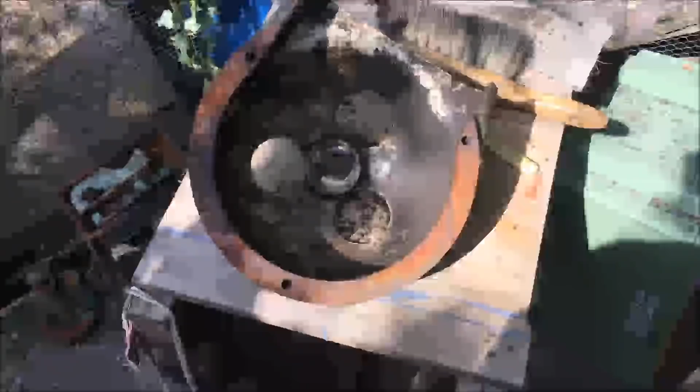Well, the sun's out, so we're doing a bit of deep cleaning on the auxiliary components. I think this is the clutch housing. I can't remember because it seems ages. It's nearly a year since we took it off anyway.

I've got to check the bearing, but I'll be highly surprised if that's in good nick, given the one on the other end's got, I think, 17 thou clearance on it, or wear.

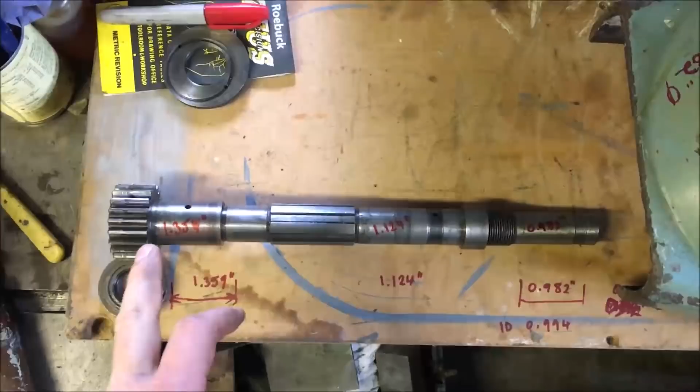So I'm taking a look at the main through drive shaft. Just to explain it, this end of it is sitting into the headstock inside another gear. It runs in a bronze bearing. You've then got a spline shaft, a pair of ball races inside the pulley which is being driven, and obviously the clutch brake unit around that to transfer, so when the clutch is engaged that pulley's transferred and basically drives onto the splines.

Now this section here and this section here both run in bronze bushes. That section is into the outer face of the casting of the headstock, so that face of the gear via that sits up against there.

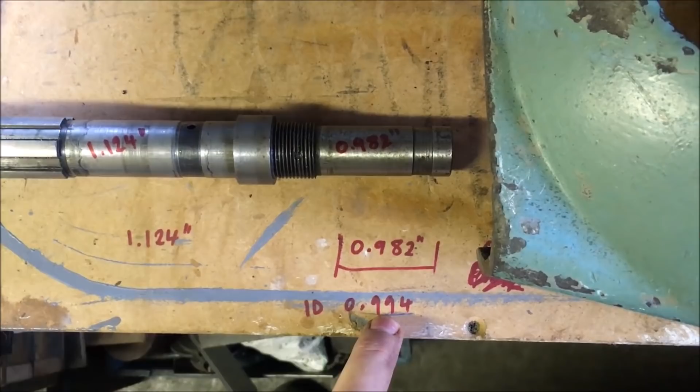When I've measured it up, there's about, I think it's 12 thou clearance between diameter - oh dear - that and the ID of that, which seems hellish excessive. At the other end of it, I've got a dimension of 982 thou against 994 thou on the ID of this one, which again seems somewhat excessive.

Now that shaft's only actually rotating when the lathe is actually working. When the clutch is disengaged, that shaft just sits still. So it still seems a little excessive as play.

Starting to look at it in terms of why that wear has happened, apart from the fact it's 70 years old. The outside bushing has got this little Winkler oiler. So you spin that round, a couple of drops of oil dribbles through, and you can see the oil lines. So I don't think that the bearing has worn excessively.

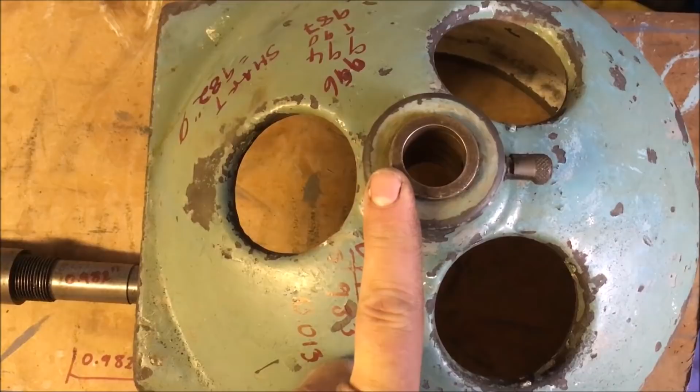It seems an odd size for it to be a few thou under an inch. I would have expected it to be an inch and then worn to slightly larger than an inch. But the shaft, as I say, is measuring at 982. And there's wear on the shaft as well.

What I've measured up is if I actually increase that to, say I half the difference on it, so instead of it being 13 thou, say I put another 6 or 7 thou on it, the nut that goes on here would still clear it. So I could build that end up. And we've already established that these bearing seats have been built up. They're a thou under an inch and an eighth.

Now this one doesn't seem to be excessively worn. There's about a thou variation over it. But the bronze bushing is worn.

Now that bronze bushing has oil lines in it, but there's no feed to it externally. There's an oil line in here, and it's drilled out, and that drilling goes all the way down to there.

So there's oil that can travel along the shaft, lubricate these two bearings, lubricate that, and I guess lubricate the face. However, the only way the oil can get into there is if, you like, is the oil inside the headstock, which seems a slightly odd setup to me.

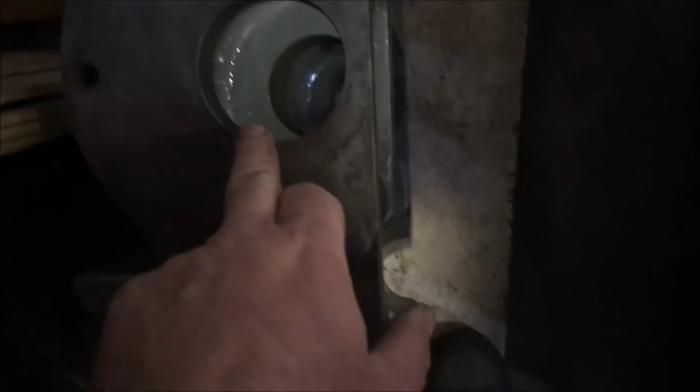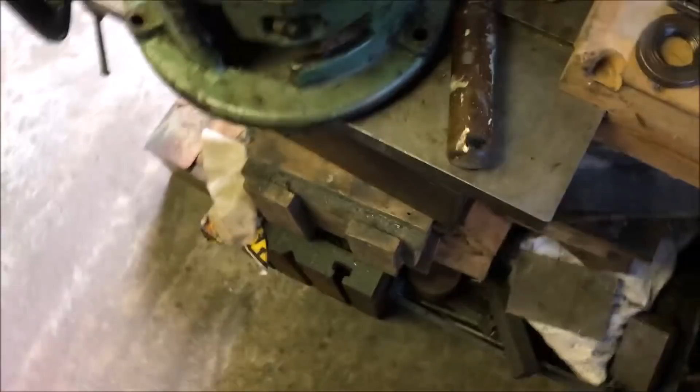That's where it's going in. So it would mean that the oil bath has got to be high enough for it to be able to splash in, or certainly get into that outside hole. And I think at some stage that oil bath's been allowed to drop, and the majority of this wear has occurred as a result of basically lack of lubrication.

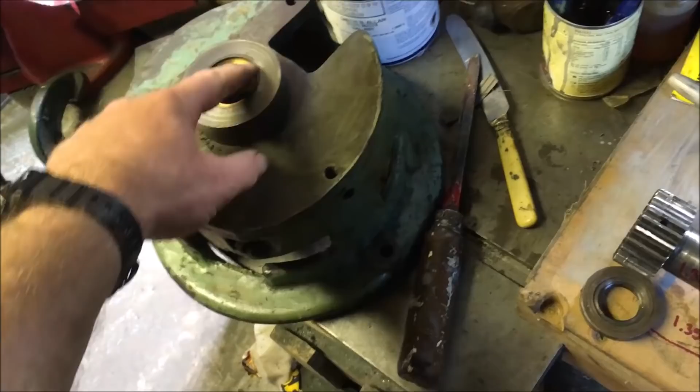What I'm toying with the idea is, do I actually - I'll have to replace that, I think, because I could build that up. It's not that far off though. The wear is all in the bearing. So if I replace that bushing, do I then line myself up?

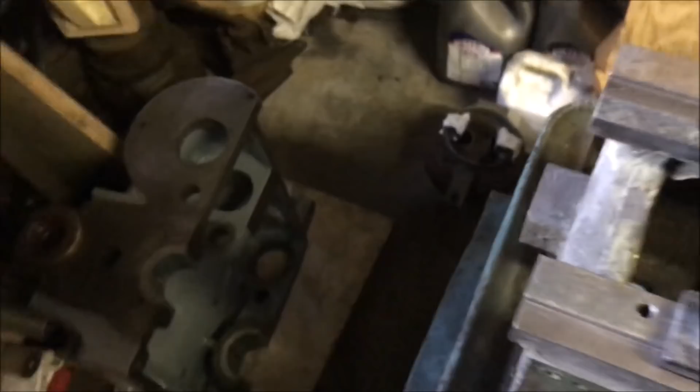And from memory, I think that's the top of the casting, and actually drill an oil line through there, pick it up on the top of the casting there, and then I'd have to have some kind of arrangement to bring it out, and then just put another oil feed on, so that would actually feed directly into that, which in itself would just give an additional feed down the line.

Seems a lot of work. Maybe I'm overcomplicating it, I don't know. But I've not seen anything like that before. It seems an odd way of doing it.

Pricing things up, if I replace that, just that one piece of phosphor bronze, just to do that one piece, is about 40 quid. So I've got to do a bit of shopping round.

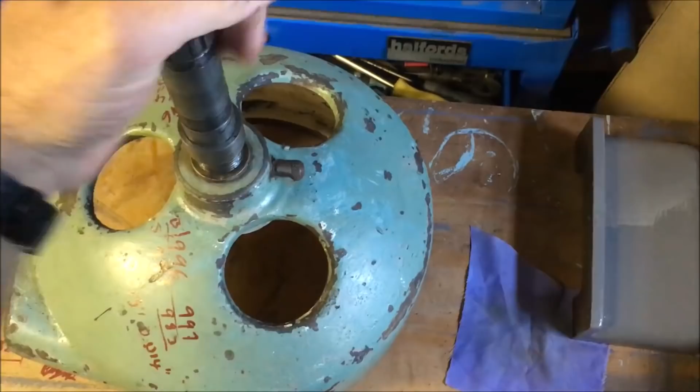I don't want to put it back as it is, because it's a bit, I think the phrase I used to hear at work was, it's a piss fit. It'll certainly run like that, but I don't want a load of rattling and clanking.

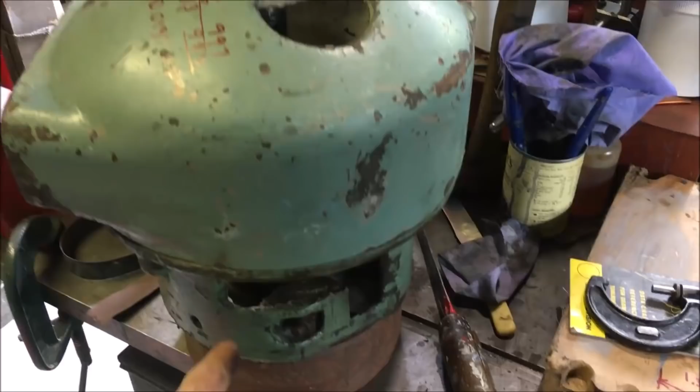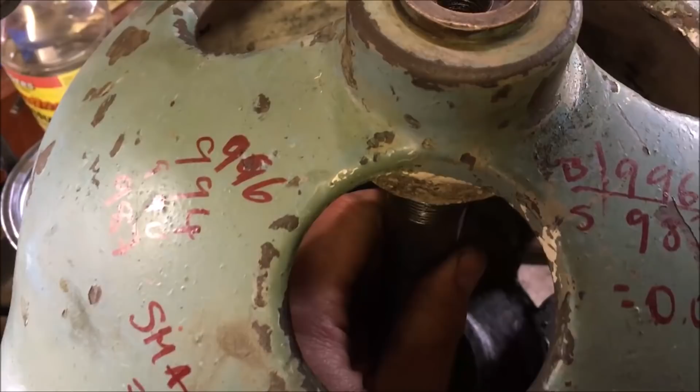So just for me to get a better idea what the hell's going on, that's the two halves of the outer casting for the clutch assembly, with the shaft in position. It's not lubed or anything, and there's nothing hanging on it, but if you watch the lower portion, most of that noise is from the lower bearing. The top bearing isn't actually that bad. I mean, I'd prefer it a little bit more snug, but...

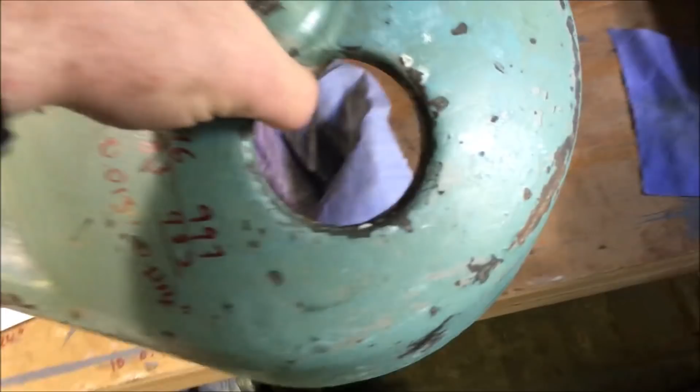We'll pull that off. That's what we've got to get a shot of.

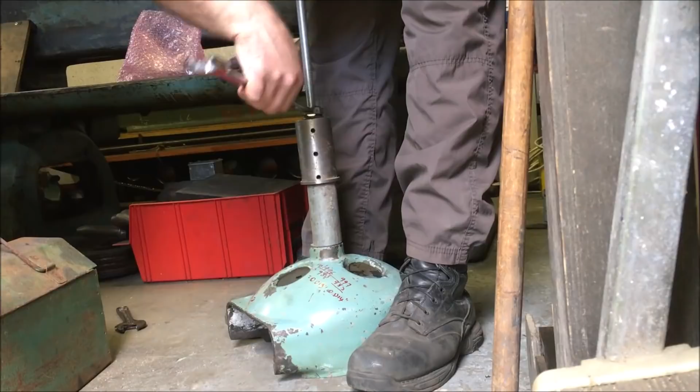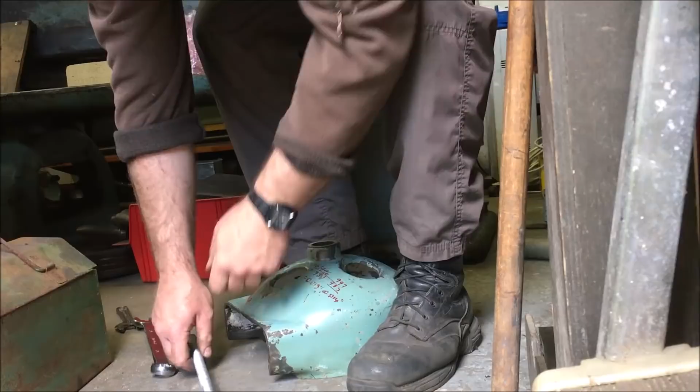One bush. Get another couple of them and we can have our own shrubbery.

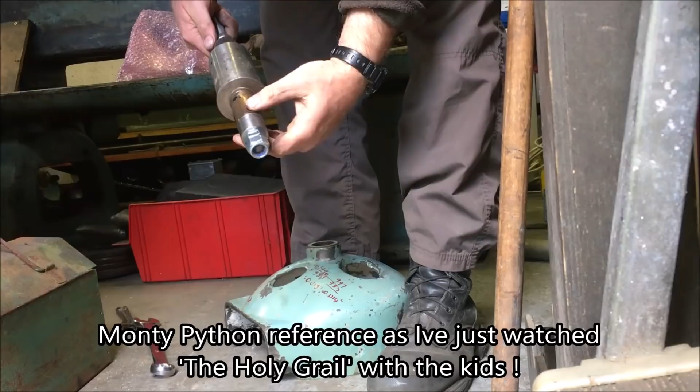Interesting that it's been relieved all the way around the lubrication point.

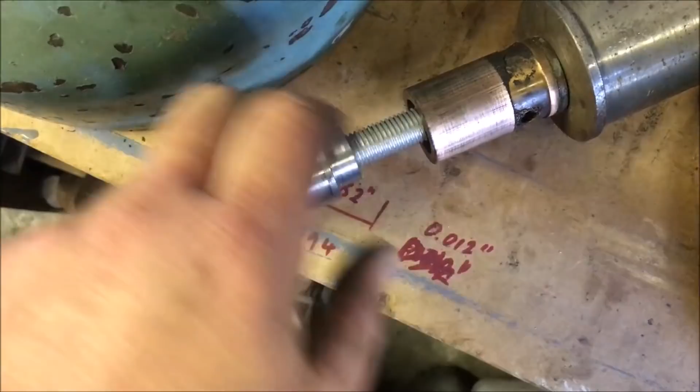So I've pulled the first bronze bush out, that's the tail end one. The plan is to make some new replacements, but make them to size the shaft that we've got. So I made up a top hat collar with a clearance hole for a 16mm M16. That goes up inside and locates, and then that's just happened to be a spacer larger than that.

And then there's a piece of tube which I'll go and find, which is actually just a length of scaffolding tube. So the nut's on the bottom, threads up through with the collar, then a tube, and then this thick washer, and just wind the end down.

However, got to lock that end, otherwise the whole shaft spins, which is a pain in the arse, because then once you start pulling it, that goes up inside the hole. But it came off, took about 3 minutes.

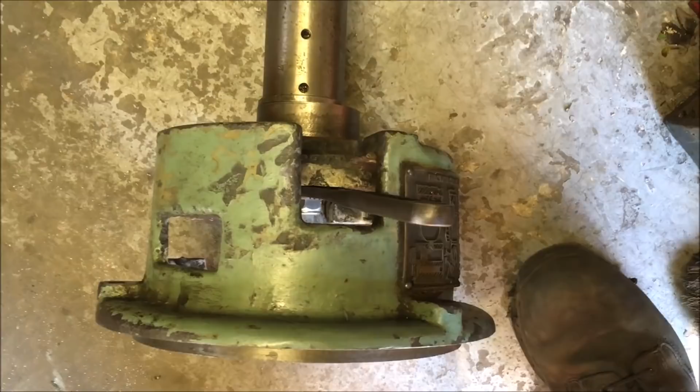So we just set up for pulling the next bushing out. I've had to make a new another collar and tube, which was a piece of scrap tubing, which has proven to be pretty tough steel. Anyway, so I've got a locking nut on the threaded shaft, and then another nut over it, spanner locked on it.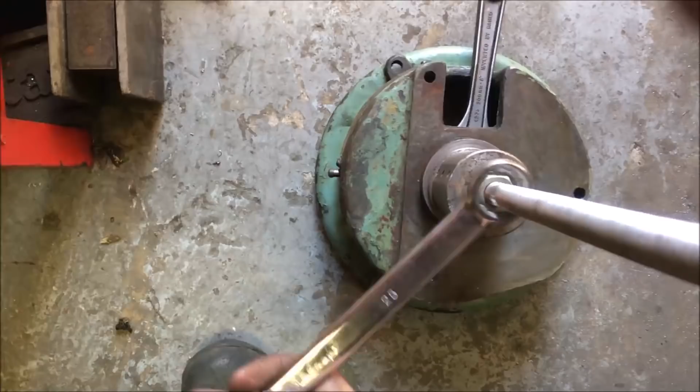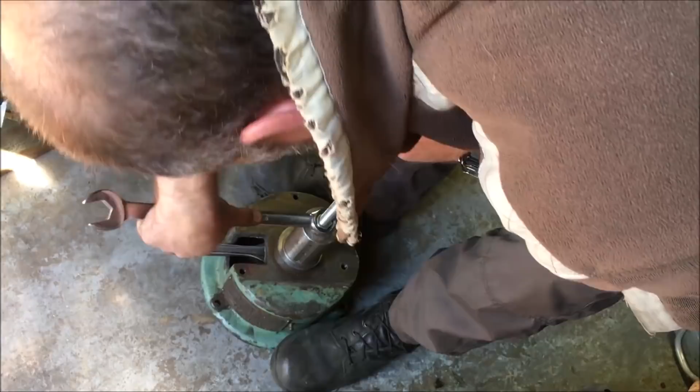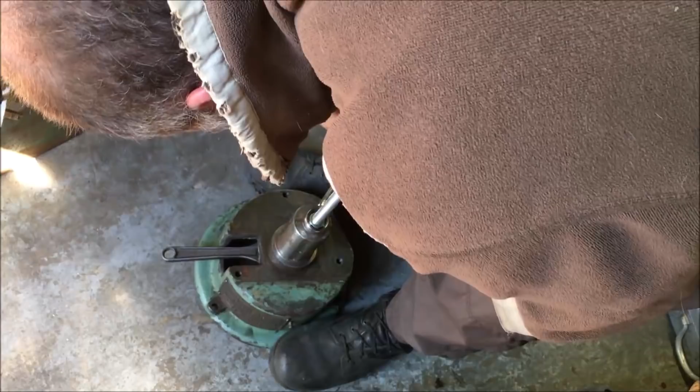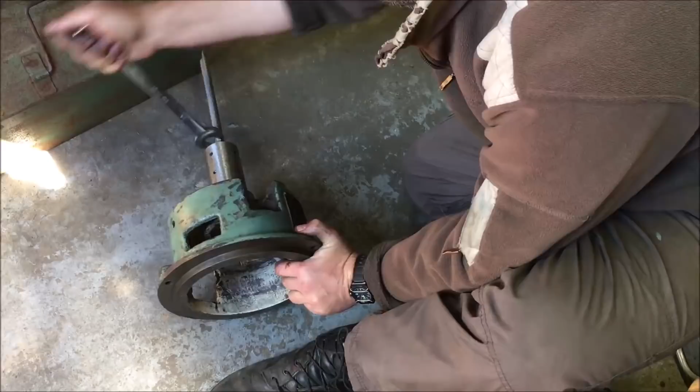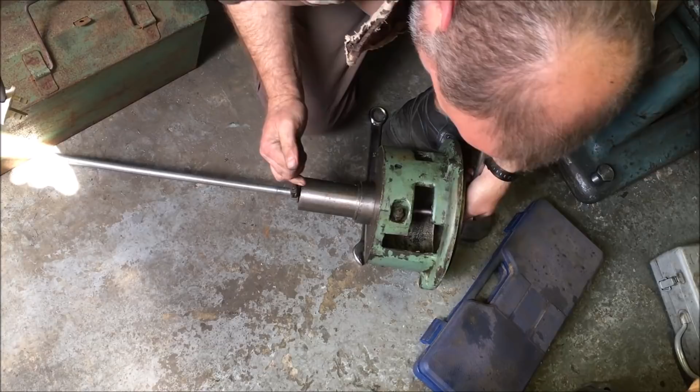I'll make sure that this collar is over the top of it. Only half inch in it. There we go.

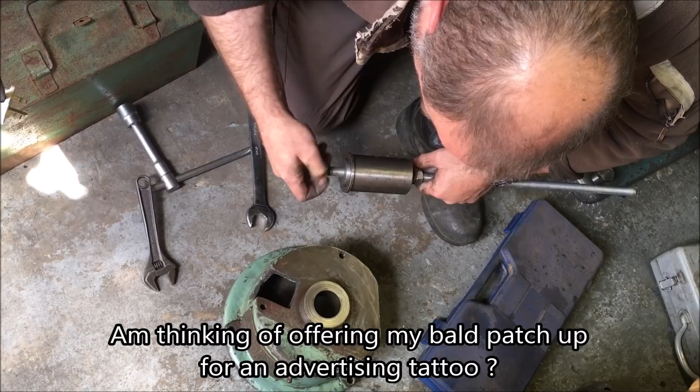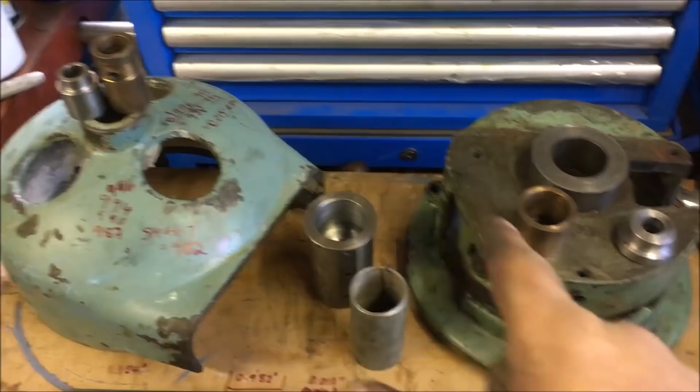Right, so there we go. Took a bit longer than anticipated because I've got to make that tube and then that tube. The two plugs were pretty much straightforward, and I'll use those to pull, or press in, probably pull them in, the replacements. So yeah...

Fresh saw cut end of a piece of bronze bar, cut with a power hacksaw, so it's a straight cut. What is it that produces that arc? It's bizarre.

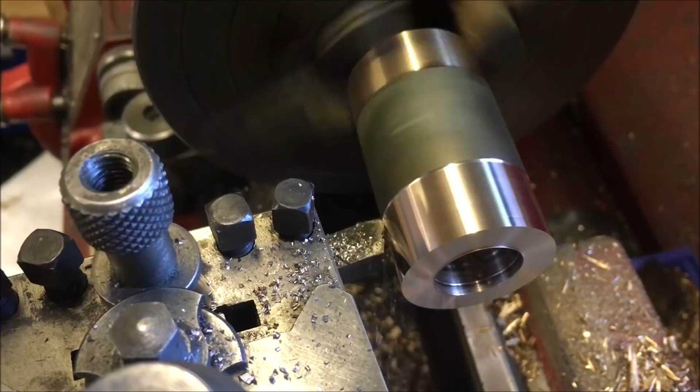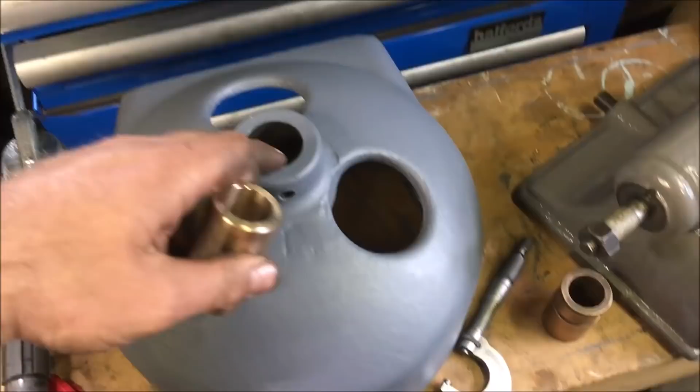That's the first bushing been made. And I've got 1.5 clearance, and when I've cleaned the end of that out, it's basically a fit. It's the same dimension, so that's why it requires a bit of a press fit.

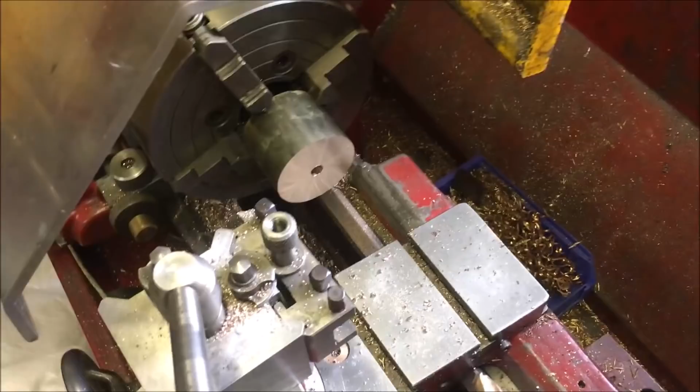Making the sleeves a slightly different way than I'd planned. Having chatted with Chris, I thought I'll ask him how he would do it. So the biggest difference is he only grips the very edge of it, faces it off, drills it through, and then drills it to about 1/8 of an inch under the ID. Then finish the OD to the size you want, then come back and bore the ID to the size that you want.

I've tried to extract from him the reason for doing it that way, and he just said, well, that's the way I was taught. There was various bits of conversation, but the long and short of it is it works and he doesn't change it.

Thinking about it, it would enable you to finish it all without taking it out, whereas my approach was: stick it in the chuck, whop a drill through, bore it out to size, then hold it on either an expanding mandrel or a mandrel that's made to fit between centres, and turn the outside so you know it's concentric. An expanding mandrel's far better than a wedge-fit mandrel, but yeah, it's just a different approach.

I guess my time's not costed on the basis of hourly rates, so if it's one fit in the chuck, it's going to be more effective, more efficient. Anyway, if I don't ask, you don't find out.

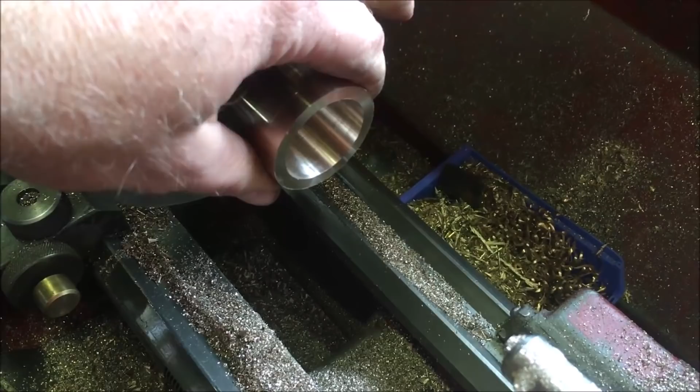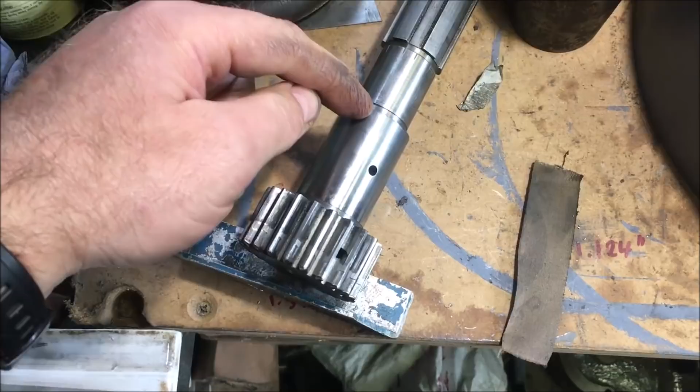Just waiting for it to cool down before we take the final dimensional pass. It's still got a bit of warmth in it. It's currently 1.5 thou undersize, and that's undersized to these positions. The centre section of that journal is half a thou below these. It was 1.5 thou, I don't know why. There was some quite bad ridges and wear, so I'm assuming that. Anyway, I've had that up and cleaned it up, and I've left this bit slightly under, so it'll be an oil pocket area.

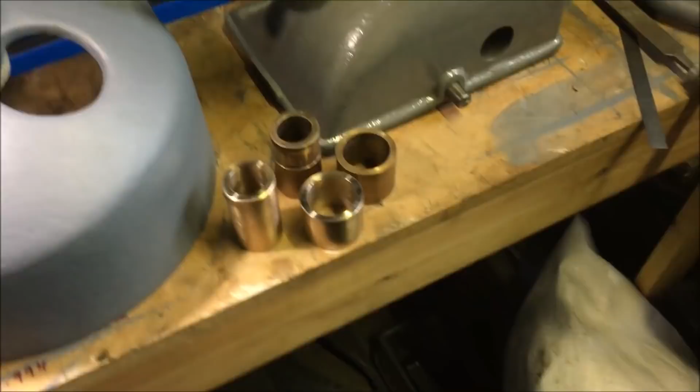Well, that's both the bushes made up now. Once they're pressed in, I'll have to drill the oil way for that one, which is the thin one, and then that needs scraping out. Chris says he's going to show me how he does that.

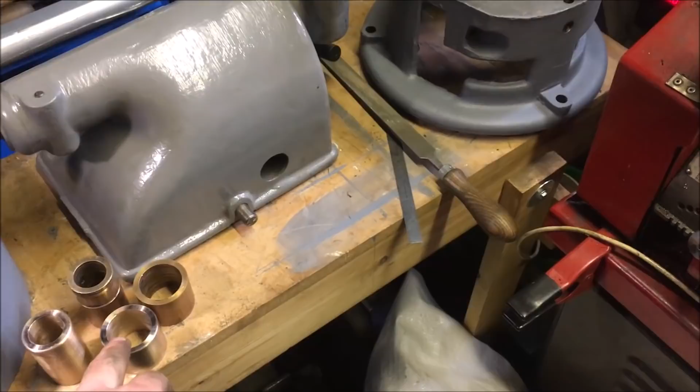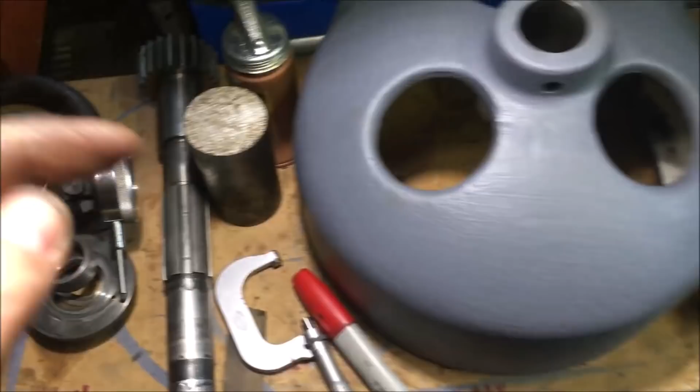That one then pressing in, and then from memory that's only got oil ways in it, but there's no - the oil is delivered via a hole in the shaft. So I'll be interested to see what he recommends for that.

Look at that waste. Ooh. Bit of sweeping up to do.

Got one more piece of bronze work to do, which is the shoes for the yoke, which moves the clutch in and out. Who knew sawing through bronze was so bloody hard work?

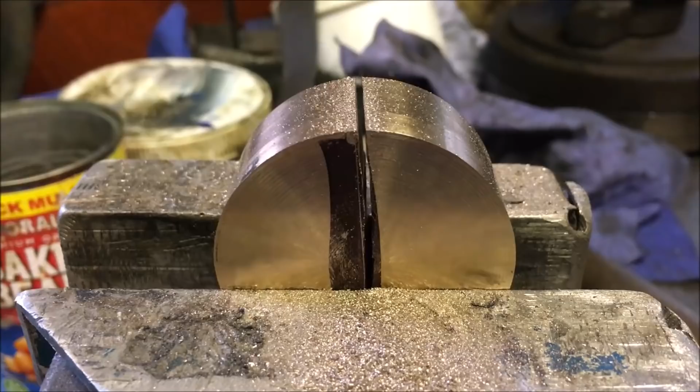I couldn't think of a way of holding it to do it any other way. Anyway, that's that done. I'm just facing it off now on the shaper. I'm only taking it slow because I don't want to spray chips everywhere.

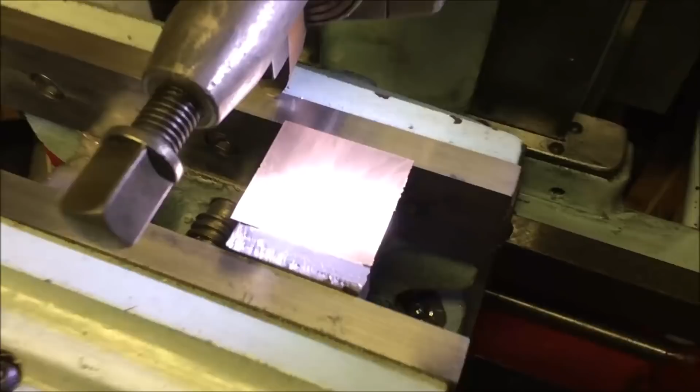It does make a nice finish. You can just see a little bit of chatter on the start of the cut. Yeah, shame my packer was a bit high - if it had been a bit lower, it wouldn't have caught. Anyway.

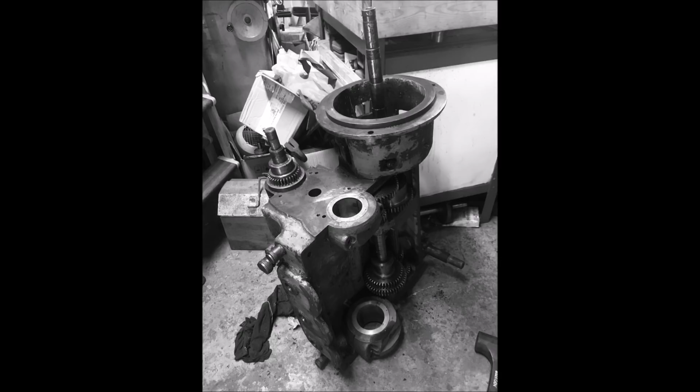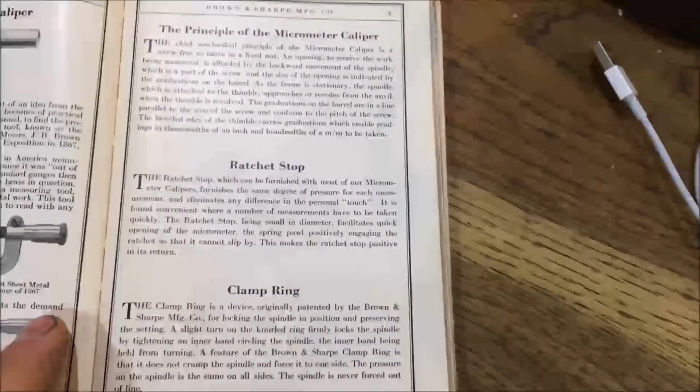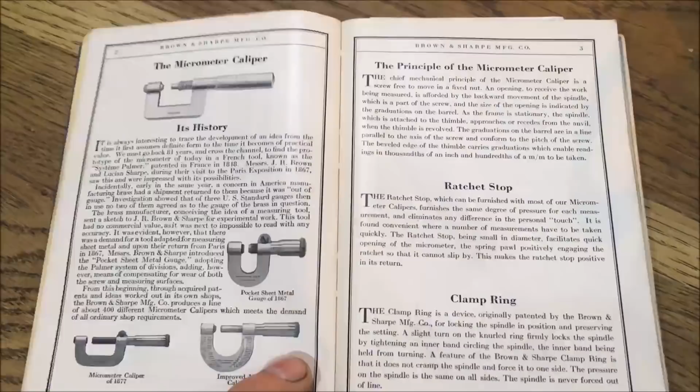Bit of an addendum. Chris lent me this Brown and Sharpe catalogue, from 1937 I think it is. I was just reading this - I'll take a photograph of it and then you can pause the screen and read down it, but it's the history of where the micrometer was developed. I knew it was French, but didn't realise Brown and Sharpe took it from a fairly crude tool to one that was, well, where we are today.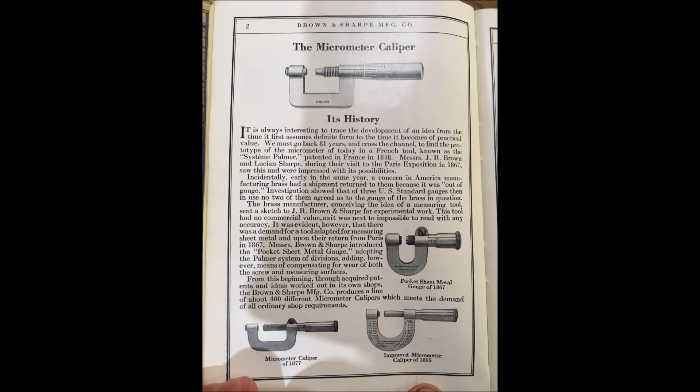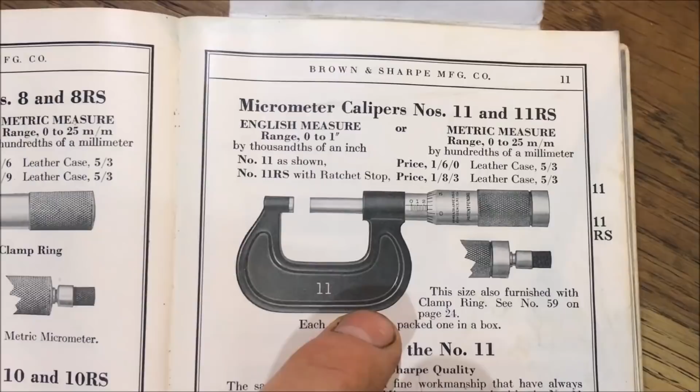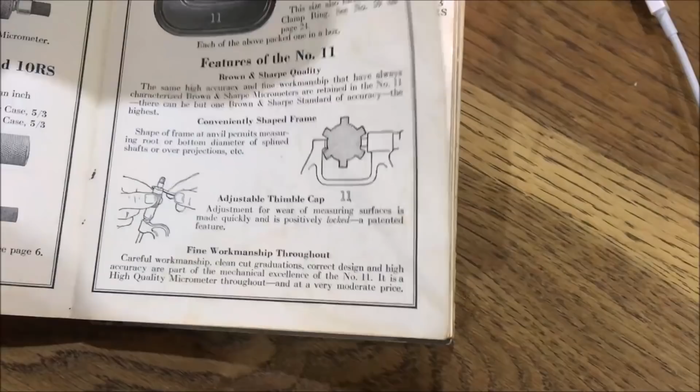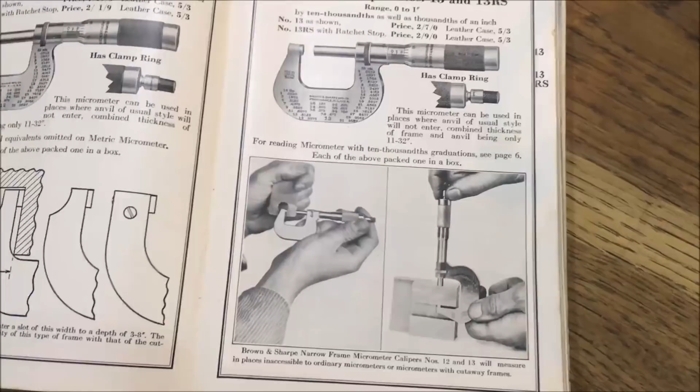The reason Chris lent me the catalogue is he's looking to replace a micrometer that he had when he was an apprentice, on the basis he hasn't got it any longer and he'd like to replace it, which is this number 11. Then he said later on, after he finished his apprenticeship, he was given a number 13, and he's not got either of them. He had a workshop in Stockport for 20 odd years, and it was robbed or burgled a few times, and a lot of his gear got half-inched, never to be seen again.

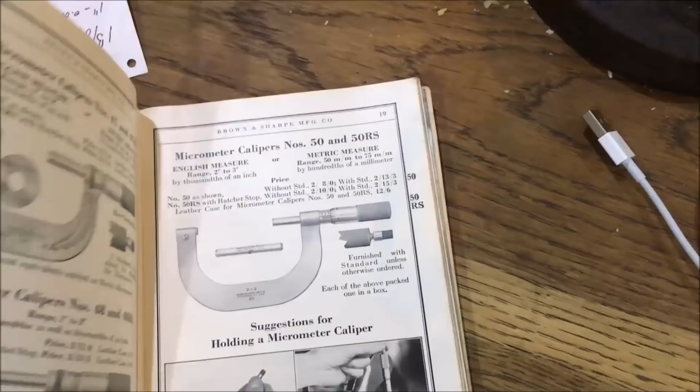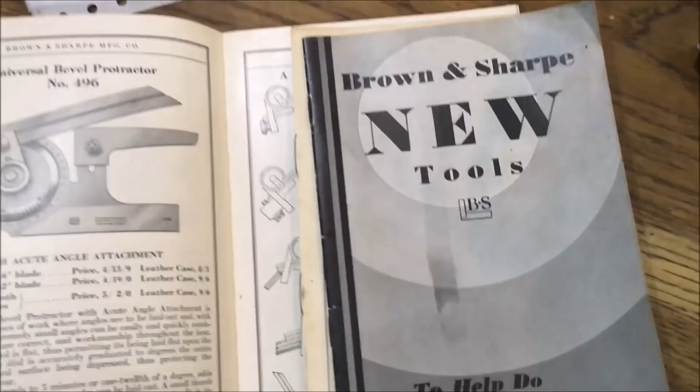But yeah, just flicking through the catalogue, it's fascinating, beautifully put together as well. I have to admit, this is the first time I've looked through a tool catalogue. There's actually a price list as well, a revised price list. This is something like 1938, I think - oh, 1936, that one. Yeah.

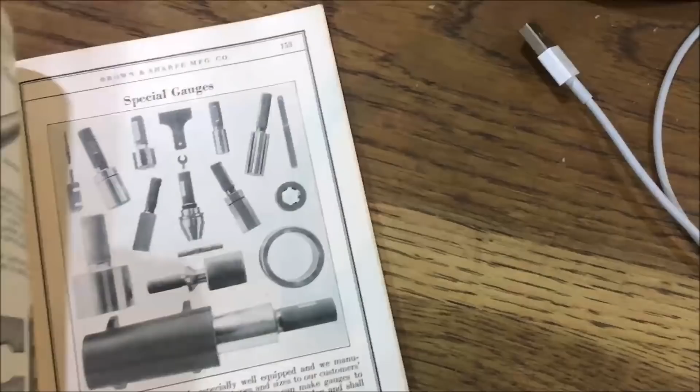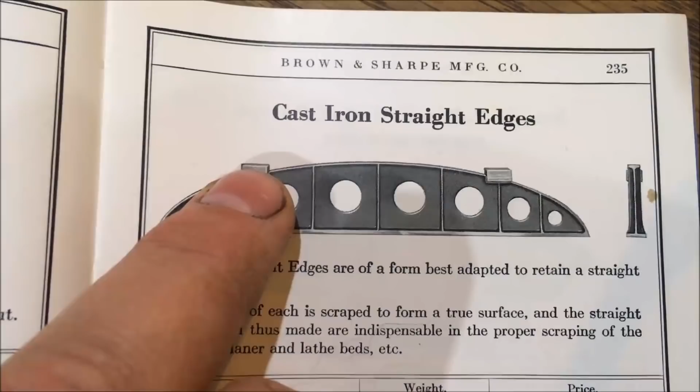What I found interesting was there's a section here showing the straight edges that they produced, of which we've got one in the workshop, if I can find the flipping thing. So that's surface plates and straight edges. You can see that's the design of the narrow one that still needs scraping up, because one of the - well, both feet want replacing. So that's a job for me later, but it's 96 inches.

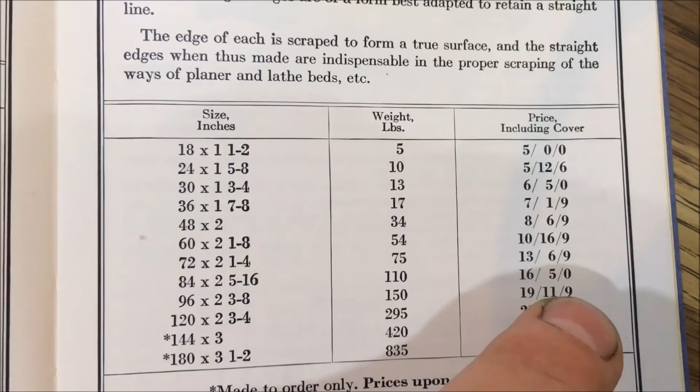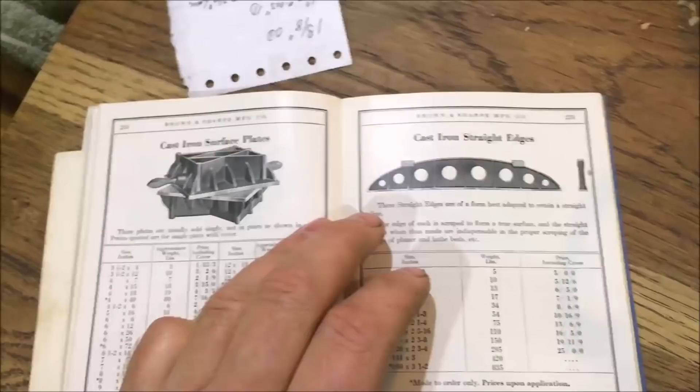Price 19/11/9, so I think that's £19, 11 shillings and 9 pence... bushels of corn or whatever it was. Yeah. Guess that would have been a chunk of money at its time. Yeah, all interesting stuff. Marvellous.